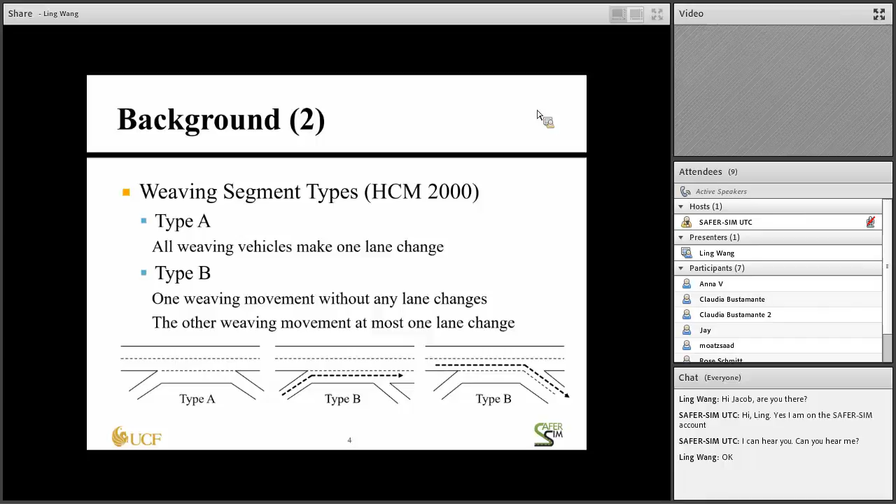The other topic related to safety that we touched on in this work is the type of analysis. You know that the majority of safety research and the traditional type of safety performance functions aim at predicting the frequency of crashes in a time period, say a year or more than one year. And therefore, these functions use the average daily traffic or the annual average daily traffic.

We think from our experience that, although this is well documented and it forms the core of the Highway Safety Manual, this is not very accurate, particularly since we are getting much more refined and better data. So in this particular research, we have also looked at hourly crash prediction, as well as what we call real-time safety analysis, which is determining the risk in real time, maybe at a 5-minute period of crashes.

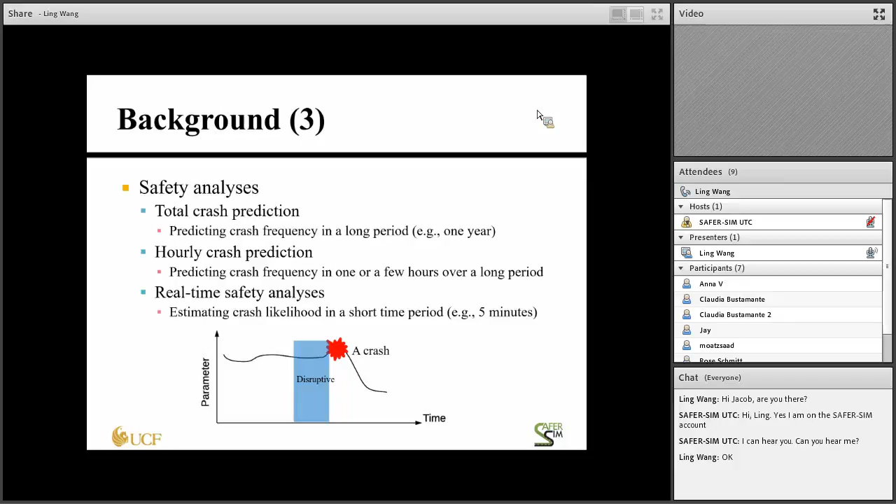And with respect to the real-time safety analysis, we are interested in looking at the flow parameters immediately before a crash. So for example, this figure shows a drop in speed after the crash, but what was happening before the crash is one of our parameters of interest. Whether this period was disruptive, how can we measure it, and how can we relate it to actual crashes, etc.

Also, I touched at the beginning on the surrogate safety assessment model, SSAM, which is a conflict-based model looking at the trajectory of vehicles in the micro simulation, and therefore determines whether this could be considered a close miss or a potential conflict. Therefore, when we feed the micro simulation into SSAM, we would be able also to get measures of safety, which is a welcome development, of course.

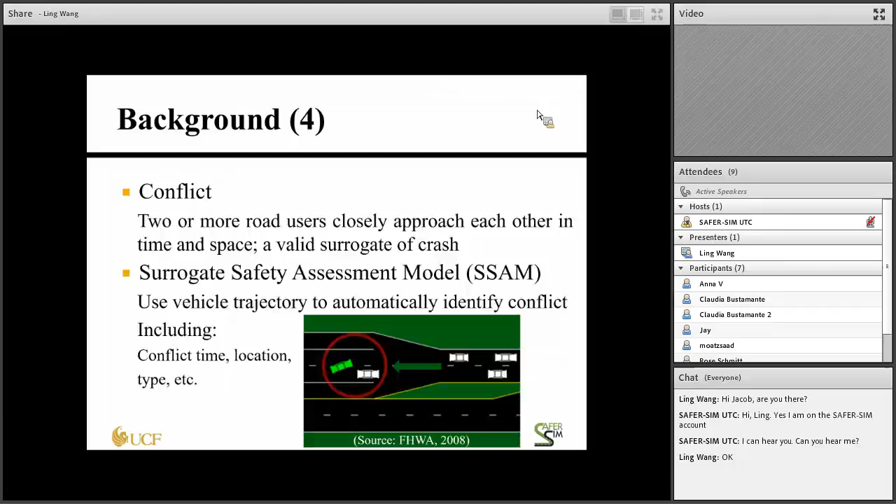The other issue that we want to get into also is active traffic management, and since we are dealing with real-time crash analysis, how this could be mitigated in real time. And of course, there are multiple active traffic management strategies, or multiple ITS type strategies that we can implement in real time to mitigate the increase in risk. For example, variable speed limits, ramp metering and other measures could be applied once we detect a problem in real time.

So these are some of the objectives of this current research: looking at the different segment types, also evaluating the type of safety analysis that would produce the best and most accurate results. Also look at the different types of crashes at segments that we consider of high risk, in addition to the simulation part, which is VISSIM and SSAM, and then implementing the active traffic management strategies in the simulation in order to improve the increase in risk.

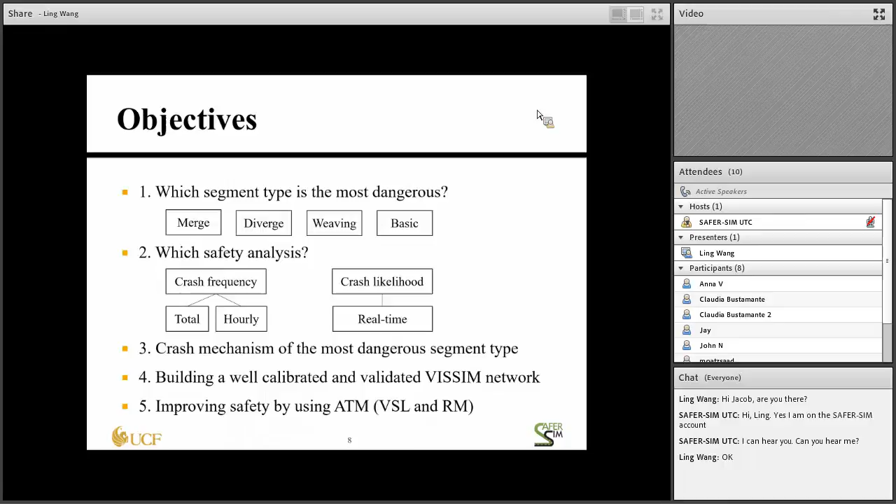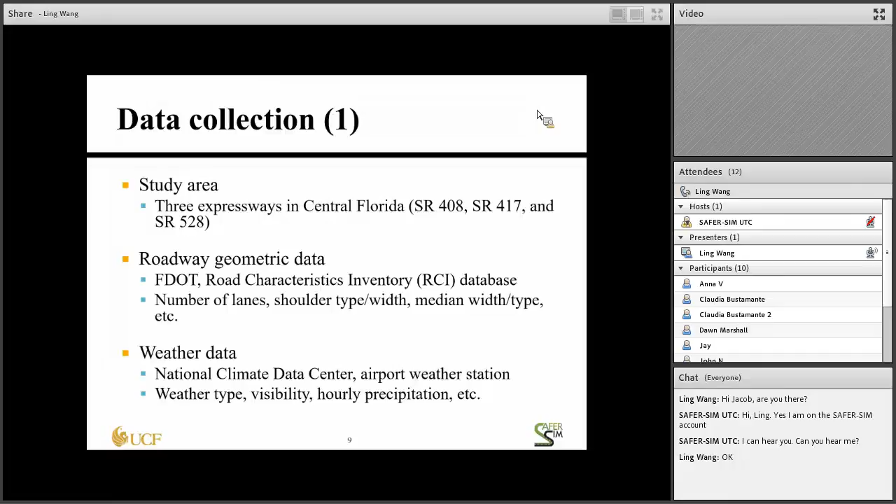The study area is the Central Florida Expressway network, and it has actually 5 roads, but we are representing here only the 3 major ones that have the majority of the traffic. We also have data from the FDOT RCI database that gives us the geometry, etc. We also have the weather data from NOAA and other sources, such as the airport weather stations that are close to the network, so that we know also the real-time weather data.

The traffic data is very extensive on this network. We have microwave vehicle detection systems and other systems, but in this particular study, we use the MVDS, which gives us minute-by-minute, lane-by-lane volume and speed and lane occupancy at a spacing of about 0.5 miles. And also we have the crash database, so we know also where crashes happened, when exactly they happened, and therefore we can identify the traffic parameters leading to the crashes.

In the study we have used 247 segments from the 3 expressways, as I mentioned, that represent the merge, diverge, weaving, and basic segments. We have developed crash prediction models, as I explained, on the 3 levels. The daily type models, which are the typical SPFs. We use the Bayesian Poisson log normal, which is typical. We also use multilevel Poisson lognormal for the hourly crash prediction, and in this case we are looking more at the hour-based traffic, as well as the crashes by time of day, looking at the crashes at the specific hour.

And then we looked at the real-time crash prediction using, again, Bayesian multi-level logistic regression, and we use the case control design because in this particular part of the analysis we are interested to look at normal situations versus crash inducing situations. So it is a 0-1 type situation, and that's why we needed control locations where crashes did not occur or the traffic was normal.

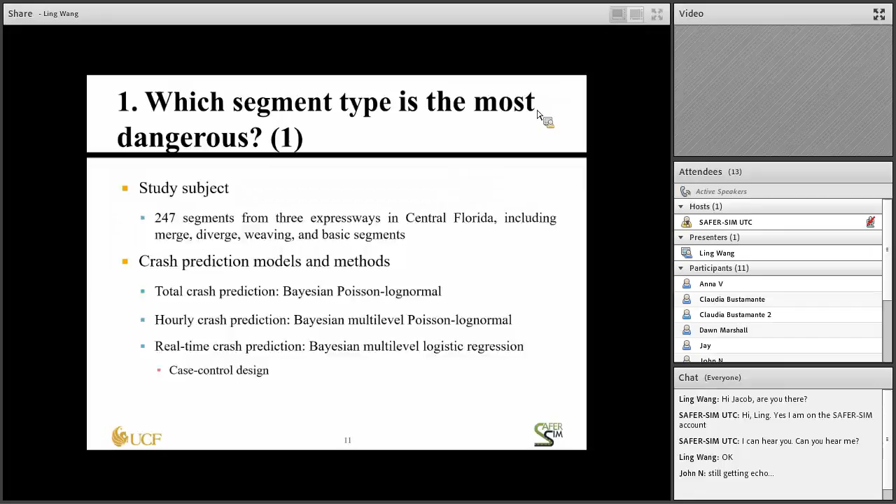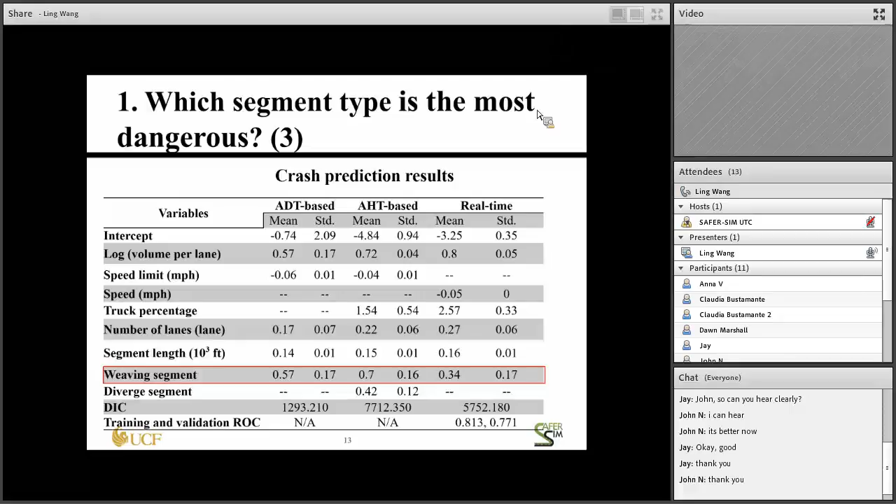Ling, do you want to add something here explaining the model? So the weaving, I think I explained it. Yeah. Do you want to add something here, Ling? No, I'm good. You are good? Yeah. Okay. Don't worry, I'll give you time to speak. Just, when I get started, sometimes it's difficult to stop, but it's interesting work, that's why.

All right. So to answer the question, which model or which is the best way to represent crashes on freeways? We looked at the hourly, the daily, and the real time, as you saw. And just to give you more information, if you're looking at a daily based crash frequency model, basically you have one period. It's 1 day, one observation. If you're looking at the hourly, you have a 24-hour representation for the day.

If you have a 5-minute interval, which is what we use in that extreme disaggregate analysis in the real time, then we're talking about 24 hours at 884 days for the study period that we studied, and 12 intervals per hour, 5 minutes by 12 is 60 minutes basically. So we are looking at much more refined data at a 5-minute interval, but the data allow us to do that, and this is the good thing about current research in big data and analytics: with the sensing technologies on our roadways and data for longer time periods, we are able to handle this data.

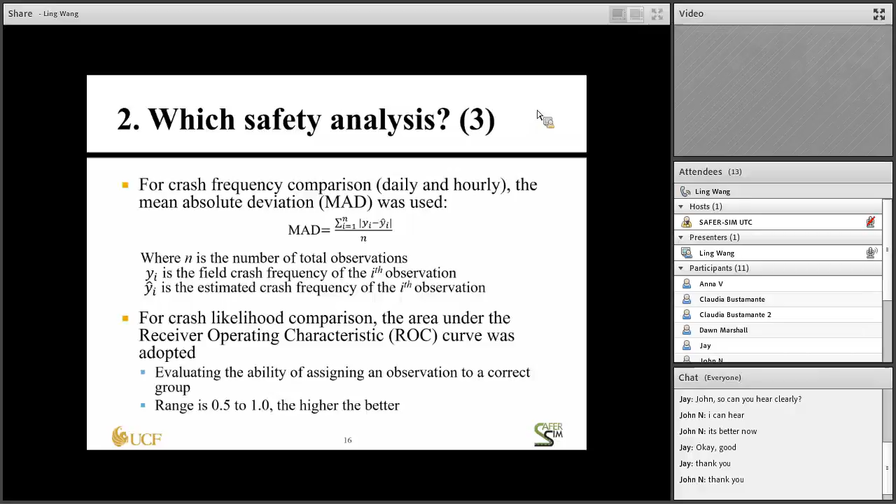And again, I am kind of questioning going back and looking at ADT based analysis, but maybe this is not the topic of today's presentation. It is possible to compare the daily and the hourly models by several measures, including the mean absolute deviation. However, for the real-time crash risk, we are looking at the area under the curve, or the ROC, to evaluate how the model is doing. So actually, we have apples and oranges here when we compare the models.

So it is easy for us to compare the daily and the hourly crash frequency model, and you can see here apparently the error is much less in the hourly model, which makes sense, because we are not just regressing all the crashes to one value, or the ADT. We are looking at the specific volume in the hour that was responsible for the crash in this particular hour. For the real time, you can see that ROC is superior, again because we are extremely disaggregate and looking at the specific 5-minute characteristics that caused the historical crashes.

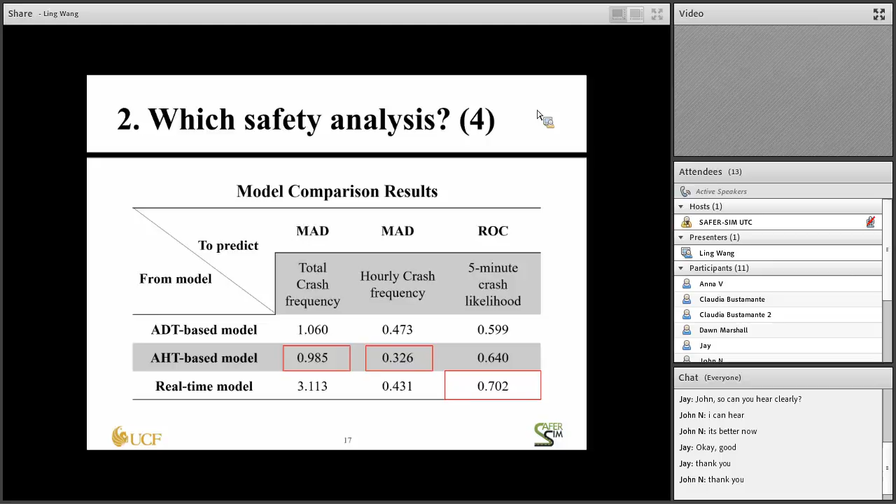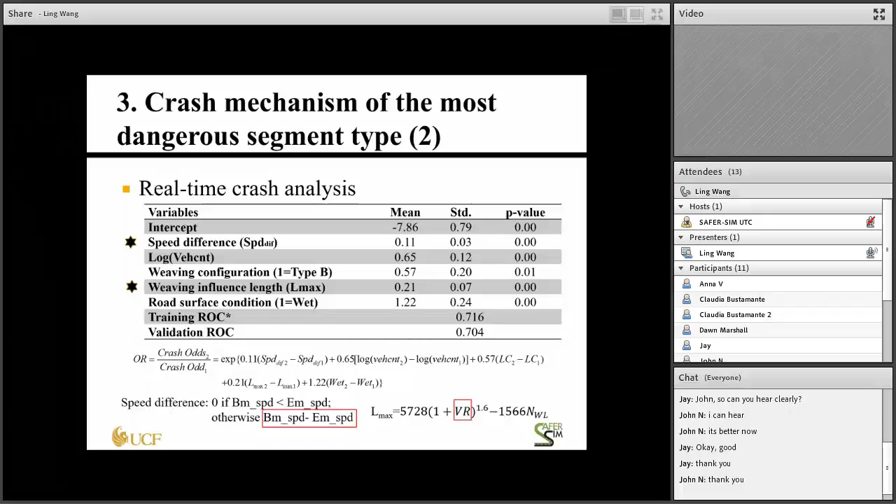And the other one is the weaving influence length. This model is provided by the HCM 2010. It estimates what distance is impacted by the weaving. And the most important variable is the weaving ratio. It calculates the weaving volume over the total volume. At that time, we were thinking whether we can use ramp metering to reduce the on-ramp volume and then reduce the weaving ratio to further increase the safety. So that is the reason why we chose variable speed limit and ramp metering in the later study.

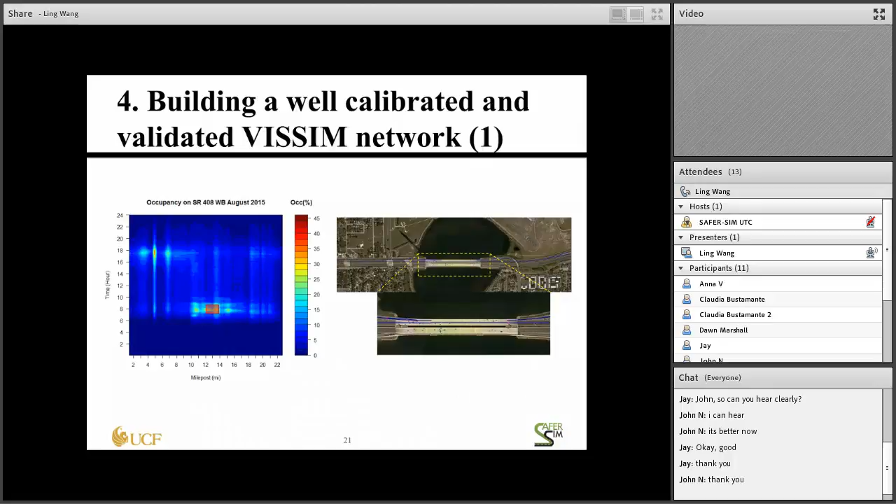And we needed to pick one of the most dangerous weaving segments in the network. We found that during peak hours, between mileposts 12 to 14, there is a weaving segment. And for this weaving segment, in the year I checked, there were 8 crashes. So we built a simulation network according to this weaving segment. The simulation time is 6:30 to 10:30, and during the simulation time, there were 2 peak hours. The geometric characteristics of the simulation network are the same as the field, including the lane width, number of lanes, diverge and merge locations, etc.

And the traffic data is from the microwave vehicle detection system. We aggregated the traffic volume into 15 minutes to capture the dynamics of the traffic. And for the desired speed distribution, we chose the off-peak hour during the day to find what speed the drivers want to achieve.

From the simulation, we ran it for 10 runs with different random seeds, and the result shows the simulation is well calibrated. The average GEH is 1.97, and for 96.4% of the observations, the volumes are highly consistent with the field, and the network is also well validated. The speed of the simulation is also consistent with the field.

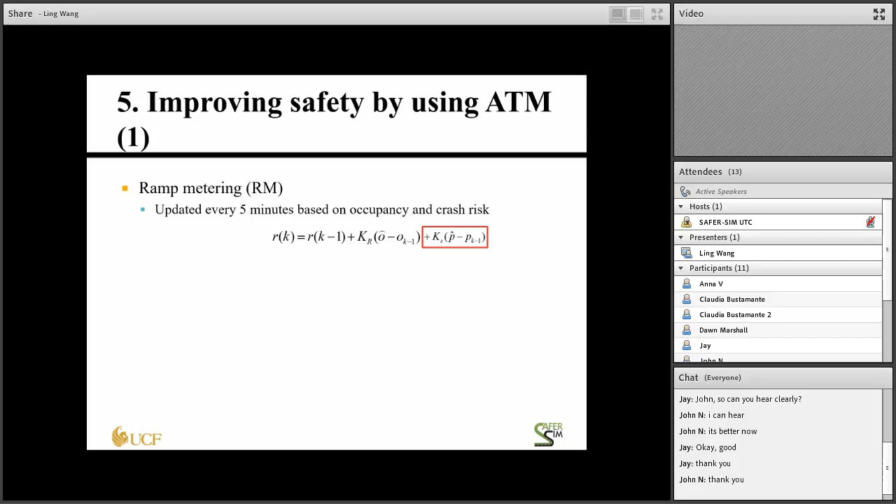So we add one more item, and this item is used to consider the safety. When the safety of the weaving segment is not good, we will use this item to decrease the number of vehicles entering the main line. And if the safety is good, we will increase the ramp metering rate. And based on the ramp metering rate, we can calculate the green time of the signal.

But usually, if we only consider the occupancy and also consider safety, sometimes the vehicles will pile up on the ramps, so it will result in a lot of delays. So we add the queue control: when the queue of the weaving segment is more than 10, we will increase the green time.

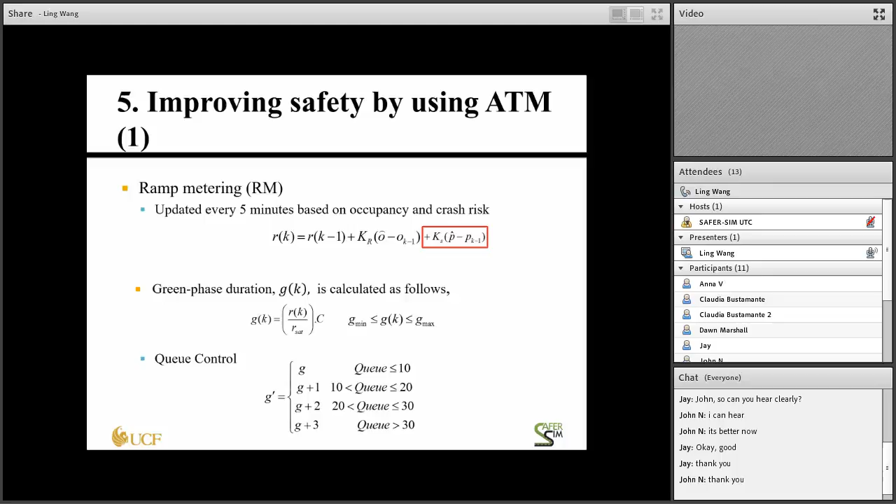In addition to ramp metering, we also have the variable speed limit. When the crash risk is higher than the critical crash risk, the variable speed limits at the beginning and the end of the weaving segment are activated to reduce the speed difference between the beginning and the end.

Additionally, we also consider the integrated strategy. This one has ramp metering and also variable speed limit. For this strategy, the ramp metering is always active, but if you remember clearly, when the queue is more than 10 vehicles, the green phase of the signal will be increased.

That means more vehicles will enter the weaving segment, but maybe the vehicles will drive at very high speed, so they cannot find enough gaps. So at that time, the variable speed limit is activated to reduce the speed limit on the main line to provide more gaps for ramp vehicles. And all the active traffic management is conducted in the microscopic simulation VISSIM through the COM interface.

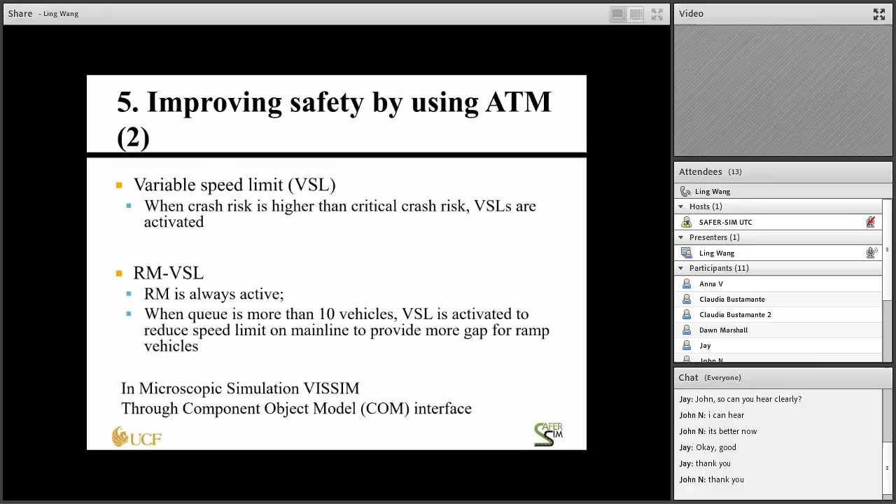This one is the network we built in VISSIM. You can see the ramp metering is installed at the end of the on-ramp, and the variable speed limit is installed at the upstream and the downstream of the weaving segment.

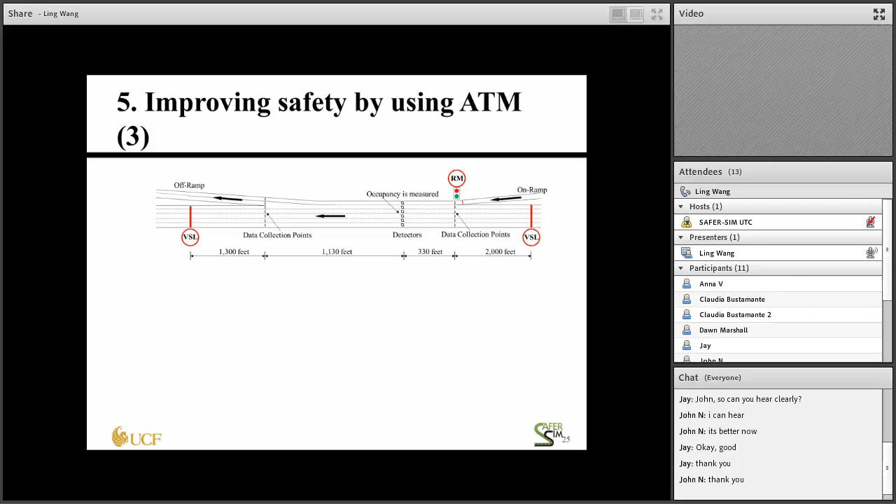In total, we have 13 scenarios. Case 1 is the base condition; we do not have any active traffic management. For cases 2 to 4, we have 3 ramp meterings. Case 2 is the traditional ramp metering. Case 3 is the ramp metering, but we do not add the queue control. But for case 4, we add the queue control.

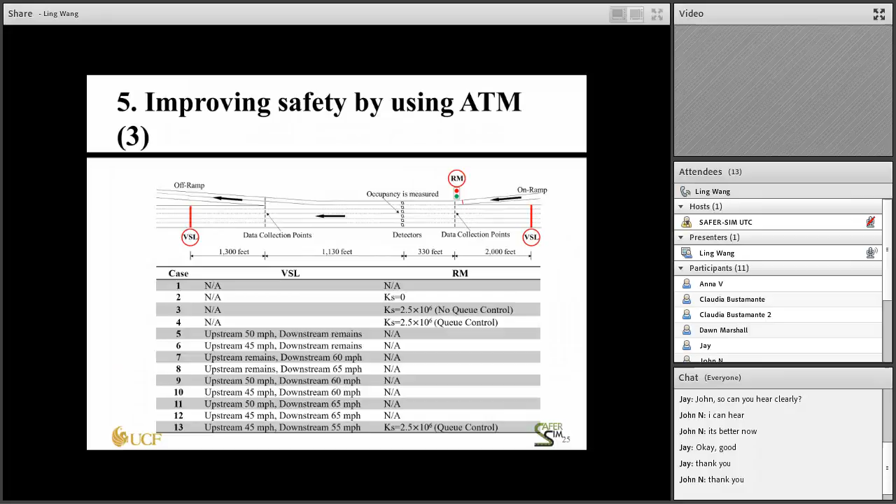Cases 5 to 12 are the variable speed limit. We have different options: the variable speed limit is installed at the upstream, or at the downstream, or at both. For case 13, we integrated the ramp metering and the variable speed limit together.

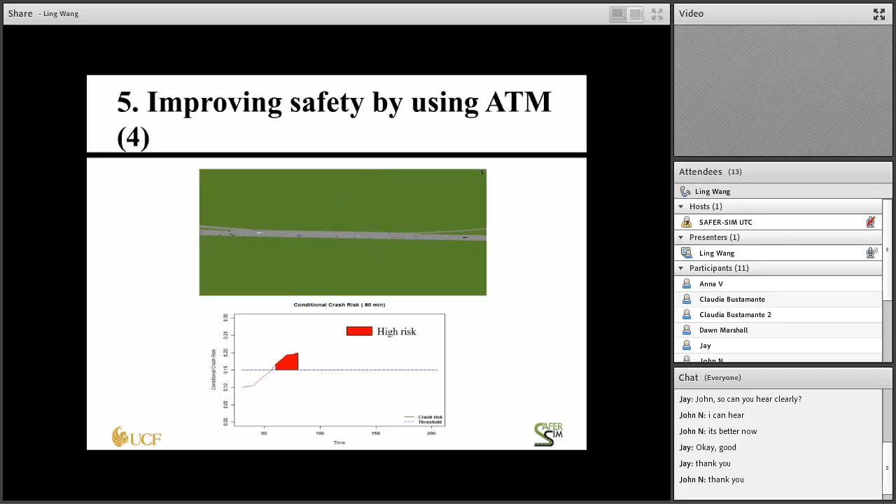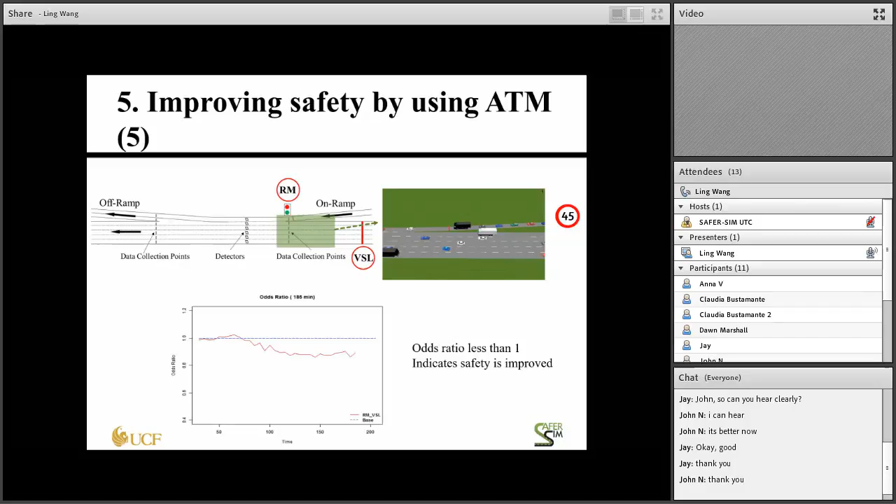So this one is before the application of the active traffic management. We can find that after about 60 minutes, the conditional crash risk of the weaving segment is very high, and you can find the high risk in red color. But after we apply the ramp metering and the variable speed limit together, you can see the odds ratio. The previous odds ratio is the blue line. After applying the ATM, you can find the odds ratio is significantly lower than 1. That means the safety is improved a lot.